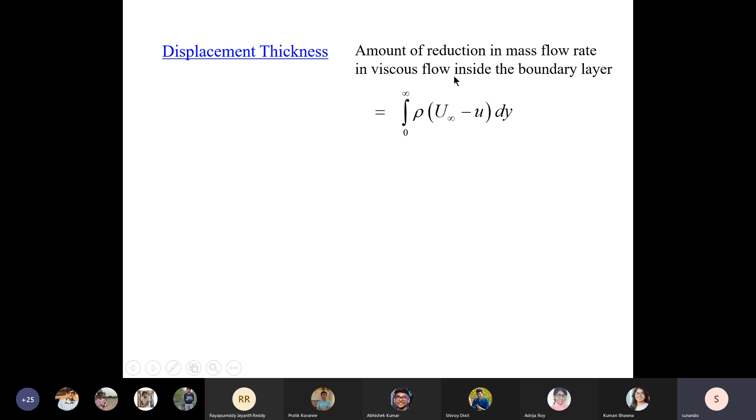The reduction would simply be the difference in velocity multiplied by rho, integrated over the entire thickness of the boundary layer. I am assuming the depth is taken to be unity, meaning in the z direction it's not affecting the velocity. So to evaluate the reduction in mass flow rate, I simply multiply delta u, the difference between what it should be in inviscid flow and what it is in viscous flow, by rho into area, which gives the reduction in mass flow rate due to the viscous nature of the flow inside the boundary layer. Any question?

Okay, so if you'd like to equate this situation with the inviscid flow, what we need to do is raise the platform, what you have seen in the previous figure, raise the solid platform, let's say by a distance, by a yet-to-be-evaluated, yet unknown distance delta star. So some amount of flow area in inviscid flow you are completely obstructing in order to obtain the same amount of reduction in mass flow rate.

So previously, whatever be that value, you are making sure that the delta star distance will be blocked for flow so as to make the reduction in mass flow rate equal to the reduction in mass flow rate which you would obtain because of the viscous flow. So if you have blocked out this delta star, what is the mass that you are not allowing to pass? It must be equal to u infinity, because in inviscid flow the velocity would be u infinity, and of course rho would be there.

So for per unit depth, the reduction in actual mass flow rate is equated to a hypothetical situation of inviscid flow with a reduction in area. When both of these are equal, the distance by which the platform is to be raised, which is delta star, is known as the displacement thickness.

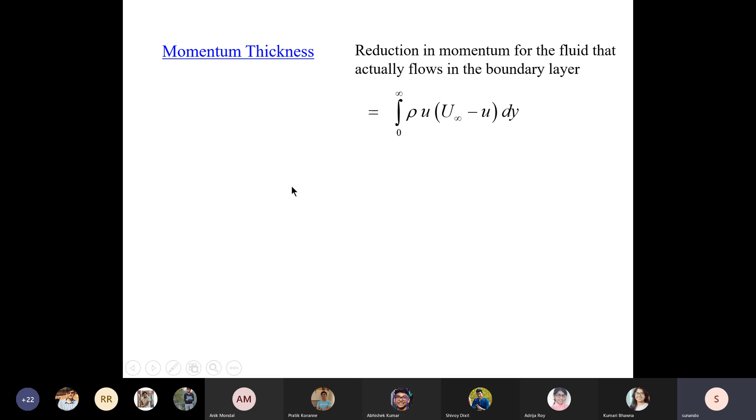So this is what the reduction in momentum flow rate is. Now, in order to obtain the same reduction in momentum, let's say I have to raise the platform, the plate, up by a distance equal to theta. So if I reduce the flow area by raising the platform by a distance theta, then the reduction in momentum must be equal to rho u infinity theta star.

That's the mass which is not passing, which is not allowed to flow now. And that mass, if it had been allowed to flow, would have a momentum equal to this mass multiplied by u infinity. So theta star is the reduction in momentum flow rate, which is equal to whatever we have discussed.

So if we equate these two, we get the expression for theta star, but there is another u missing here, u infinity missing here. Please change this, I will do that.

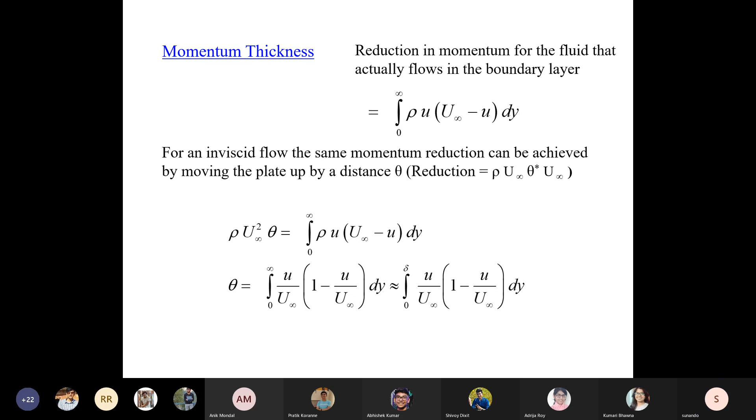We will keep these definitions in mind, and when we talk about the momentum integral equation in subsequent classes, you would see that theta and delta star would appear in the expressions, and it's very straightforward. It's almost like this name sounds something very serious, but momentum integral equation, once you learn how to use it, it's going to be simpler than the Navier-Stokes equation, which you have handled in your second year.

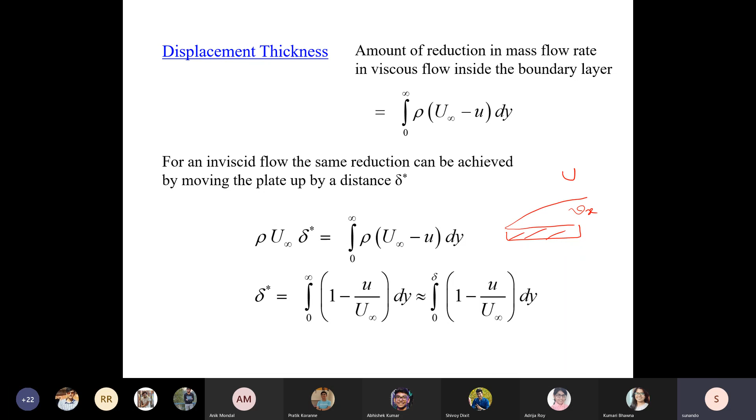What I'm going to do now is give you some handwritten notes. This isn't in your text, but I talked about the Blasius solution, which is an analytic solution. I will go through this quickly. The important part is not the solution process itself.

The important part is what you make with the solution. Is there additional information or insight that can be obtained if we solve it analytically, followed by numerical solution of the governing equation? So I'm going to show you some of the steps, not all, since not all are important.

The key concepts I will mention, just stay with me for the next 10 minutes, and we will convert the governing PDE to an ODE. We have two equations: the equation of continuity and the equation of motion. Notice the equation of motion does not contain del square Vx del x square, for reasons already discussed.

What Blasius saw by analyzing data is that the velocity in the x direction, when plotted against a non-dimensional distance from the solid wall, has a definite relation between the two. The non-dimensional velocity is u over u infinity, related to the non-dimensional distance y over delta, where delta is the local value of the boundary layer thickness, which is a function of x. This equation is to be solved with the boundary conditions already discussed.

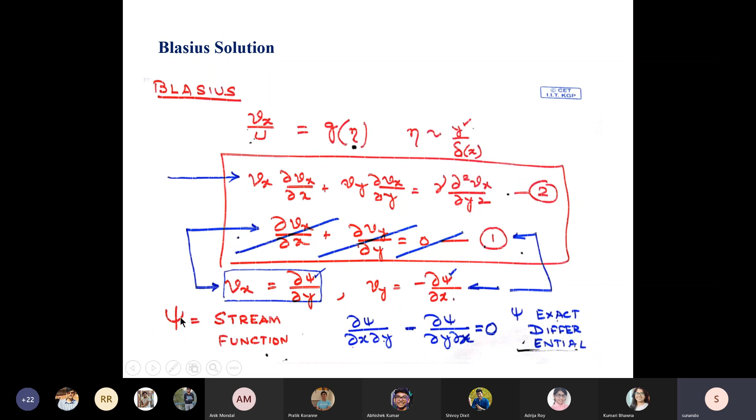That means we have one less equation to solve, and all the velocities are to be converted not as Vx or Vy, but in terms of the stream function, and then we can solve equation number 2 this way. So this is my equation.

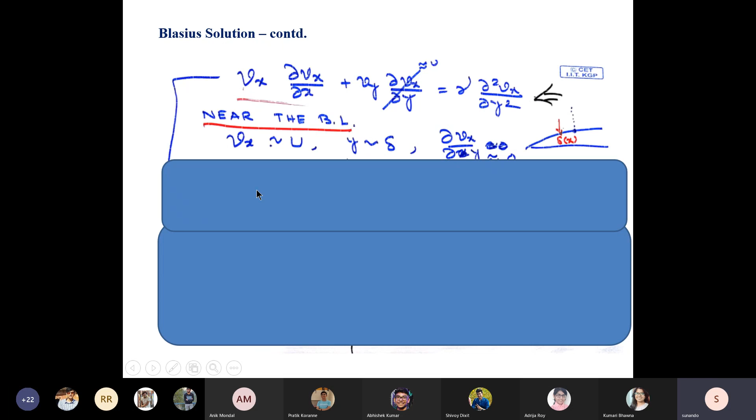We could see that near the boundary layer, the velocity is going to be approximately equal to u, as y tends to delta, and del Vx by del y, the gradient of velocity with respect to y, would also approach zero. Considering these approximations, we can do an order of magnitude, approximate analysis of the governing equation for the boundary layer.

Near the edge of the boundary layer, this term will vanish, and this will have a certain order, whereas the right hand side will have the order of nu, the kinematic viscosity, and del square Vx by del y square would simply equal u by delta square. The purpose of this analysis is to get a relation between x and delta.

How is it done? If these are equal, then delta square will be of the order of nu x by u, where u is the free stream velocity -- it's not an equal sign, but an order relation.

Going back to the previous step, we are defining a combination variable. One way to solve a PDE is to define a combination variable, and here it's eta, which explicitly contains y and implicitly contains x through delta. If we get an approximate relationship between delta and x, that should suffice to get an expression for eta.

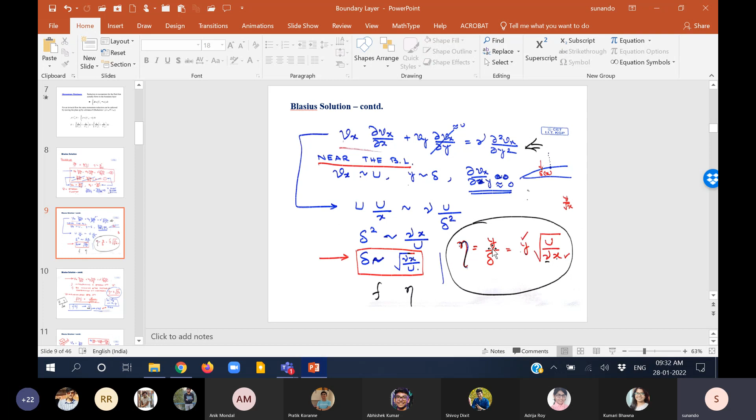So we introduced a stream function, then invoked the method of combination of variables to obtain this eta. Since this equation is dimensionless, I'm simply writing a dimensionless stream function. The hope is that once I substitute this in here, I would get an ODE between F of eta and eta.

That's how you convert a PDE to an ODE. I would just show you some of this. If you are interested, you can take a look at it. It's not in Fox and McDonald, but in earlier versions it was there, and it's available online, so you can take a look.

So I find out what Vx is, which from the definition I know is del psi del y, the stream function. Then I convert everything in terms of eta. What we get is Vx equals u df d eta. Similarly, I can find the expression for Vy. These two are the main results which we are going to use subsequently.

But let's proceed with this. It has been shown by Blasius, and you can take a look at the few more steps needed to ascertain that defining an eta combination variable reduces the PDE to an ODE, a nonlinear ODE like this one, where f is the dimensionless stream function and eta is the distance variable, which of course contains both y and x together. The important observation is that it's an ODE right now, so it would be easier to solve compared to the PDE we were dealing with before. So this is what the equation is all about.

I'll go back to this. Vx gives... so what is going to be the value at eta equals 0? Please participate a little bit more. I understand this is not the ideal situation, but I would at least like to hear some comments from you, questions, or whatever. Can you hear me? Am I audible?

Yes sir, okay, if I am audible, just try to answer that. How do I say that f prime is 0 at eta equals 0? Is it not obvious from here? At eta equals 0, that means on the solid plate, due to the no-slip condition, Vx will have to be equal to 0. So f prime will be 0 at eta equals 0.

Would that give me something? I have used the definition of Vx as obtained from the non-dimensional analysis I performed, and I have obtained that at eta equals 0, f prime will have to be equal to 0. But does this give me any other boundary condition for what f is at eta equals 0? What is going to be the value of f? Looking at these two, can you tell me what the value of f is at eta equals 0? I understand that at eta equals 0, f prime is 0, but what is the value of f itself? Just concentrate on the two red boxes.

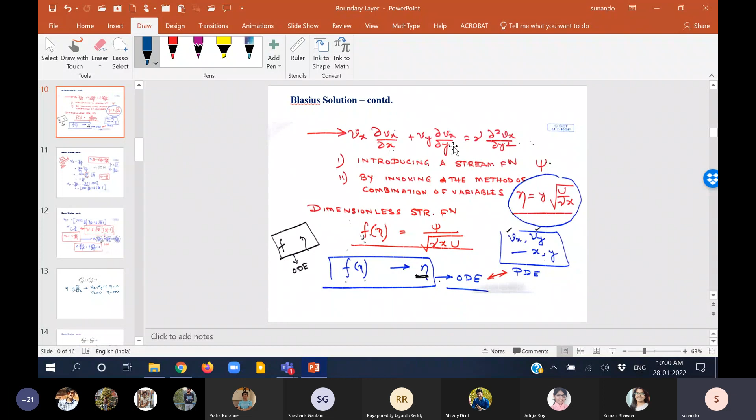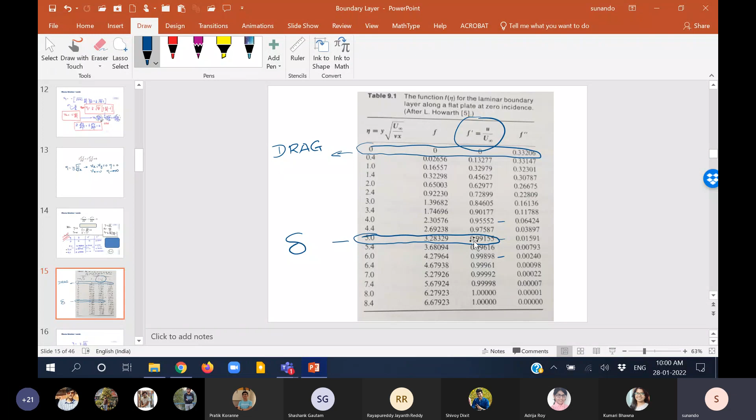Even for the simplest case, you have to do a lot of mathematical jugglery, identify some dimensionless combination variable eta, with which each of these terms transforms the PDE to an ODE. This underscores the utility of the analysis we have discussed so far, but also highlights the severe limitation, the severe restriction we have on such results for delta and, for example, CD or CF. So what is going to be the case if it's not flow over a flat plate, but over a curved surface?

How can I treat turbulent flow, which is the most common industrially relevant flow situation in most cases? The analytical approach gave us very good understanding for a simple situation. It tells me that delta varies with root over x, and gives an idea of how CF varies with x and other parameters. But it is a restricted form of the solution, and we must realize this approach is untenable for complicated geometries and complex or turbulent flow.

It is very likely that the growth of the boundary layer that you see here, when turbulence sets in, is going to change. The rate of growth suddenly shoots up when we convert from laminar to turbulent, and it becomes quite disturbed. The edge of the boundary layer changes its position with time, becoming an irregularly varying or oscillating boundary layer, and it is definitely not possible to use the approach we used before.

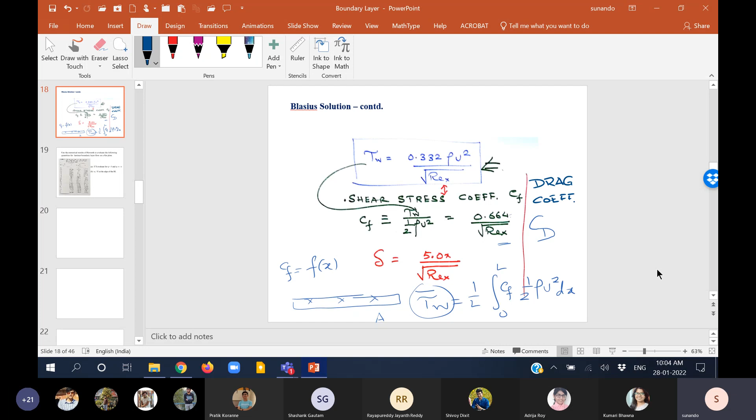Any question? Okay, I will take a break, and once I come back, we will solve some problems based on whatever we have discussed so far.

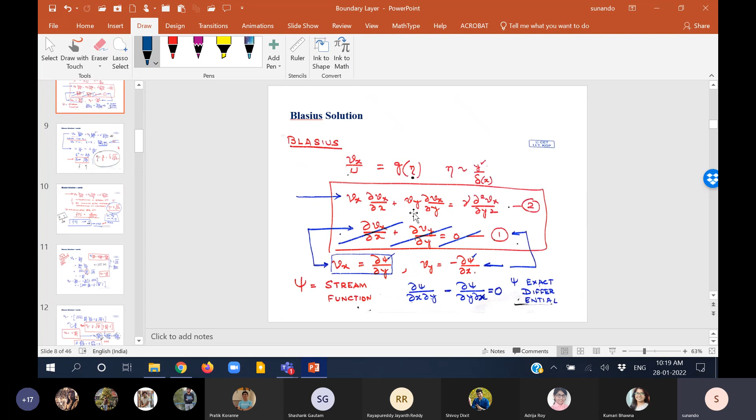The first part, A. And the definition of delta star, I'll reproduce for you. That's the definition of delta star. And of course, you have to use the definition of eta, where eta is simply y times root over u by nu x, where nu is the kinematic viscosity and x is the actual distance.

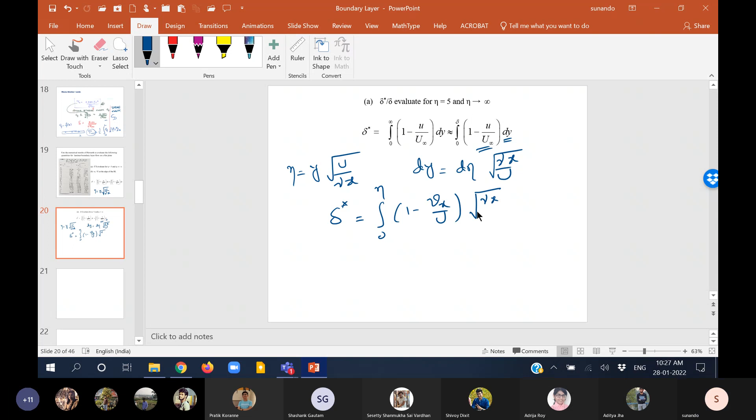And delta star in the formula that we have is going to be integral from 0 to eta of 1 minus Vx by u, and d eta can now be this is what we should get. And then ultimately what we get for delta star is, if I take this out...

What should be there inside the first bracket? What should I write inside the first bracket in place of 1 minus Vx by u? 1 minus f prime, 1 minus df by deta. So now you can see that we are in a position where I have started with the definition of delta star and converted it into d-eta, etc.

The thing that is still remaining is this. So if you look at the question here, you're going to find out delta star by delta in terms of some value of eta. So I am pretty much confident that I will be able to handle the integrand, but I am missing delta over here. So do you feel that this is something which we can convert to delta?

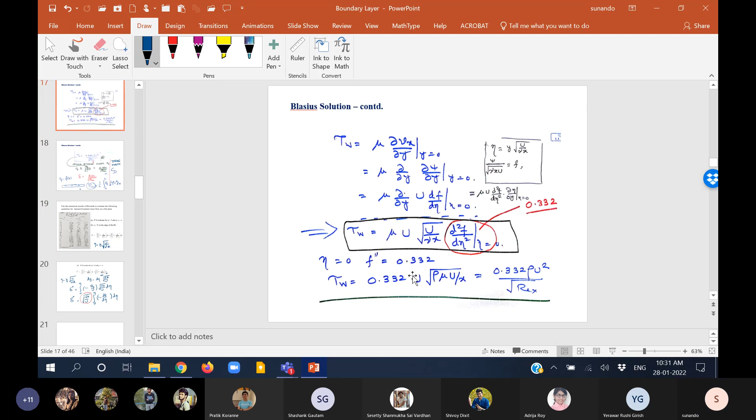Yes sir, okay? To continue with what you have said, let me go back a bit. You are talking about this one, right? Yes sir. Okay, so if that's the case, then your delta by five is x by root over Rex. Or rather, you are talking about this part. Maybe the square, the rectangular bracket, is something more meaningful here, where we can see that five equals delta root over u by nu x.

So keep this in mind, and let's go back to the problem that we are talking about. So what are you going to say about nu x by u? I'll go back to that once again. What is nu x by u in this case? Isn't it delta by five?

This which we have obtained in our derivation just a few, maybe 10-15 minutes back. If I concentrate on this, I would be able to convert this delta star as delta by five, and then whatever we have on the right hand side. Do you agree or not?

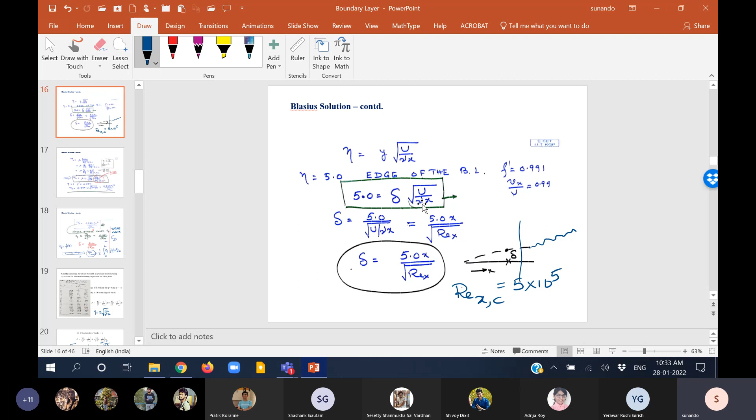Root over nu x by u is simply delta by 5. I will go back to this once again. If you look at the expression over here, if you simplify this, if you substitute the value of expression for Rex, you essentially get the same one. So from here, delta by 5 is simply the inverse of this, and that's what we have in this expression, root over nu x by u. So this must be equal to delta by 5.

So if I go back and write it, what I get is delta star is equal to delta by 5, and the integrand then becomes integral from 0 to some value of eta of 1 minus f prime times d eta. And if I integrate this, I get equal to 1 by 5 times eta minus f from 0 to eta.

And here I have to use the value of eta equals 5 in one case and eta equals infinity, and find out what is the ratio delta star by delta.

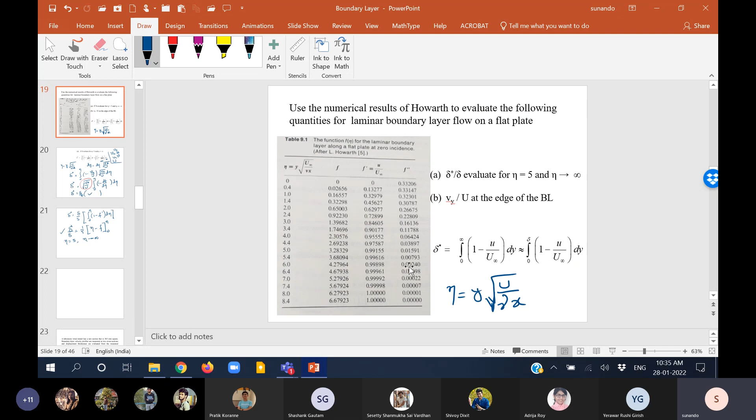The problem that you are going to have, so let's go back to this table and try to see what this is going to be. So I'll go back to this table, and what you have seen is that delta star by delta equals 1/5 of something. 1/5 of what was the result? 1/5 of eta minus f.

So, 1/5 of eta minus f. So you know the value of eta is 5, and the corresponding value of f is 3.28 something. So you are evaluating delta star by delta to be equal to 1/5 of eta minus f from 0 to eta. So as far as this part is concerned, you do not have a problem, because the value of eta at 5 and the value of f at eta equals 5, these are known to you. You substitute 5 minus 3.28 and you get the value of delta star by delta for this value of eta.

But how are you going to find out eta equals infinity? It's only up to 8.4 that's provided. Purposefully, nothing is given beyond 8.4 in the Howarth numerical solution. Think and answer.

So because anything beyond eta equals 5 can be considered infinity, because the free stream velocity won't change. I agree with you, but do you mean to say that if I say 5 here, the corresponding value of f is going to be 3.28? But let's see if I take 7, and this becomes 5.27. So I accept your observation that anything beyond eta equals 5, it's not changing much.

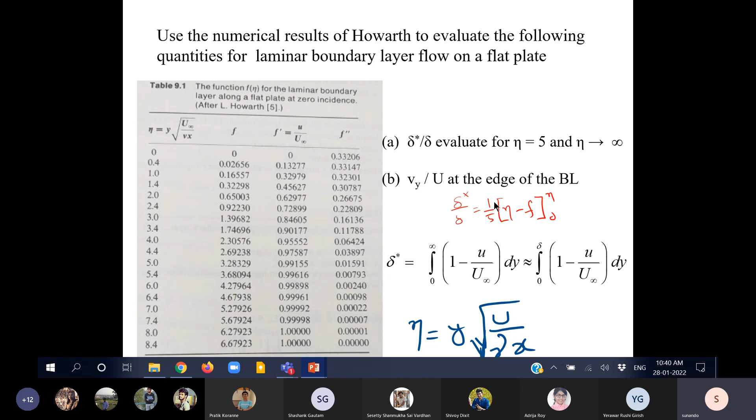Okay, now you concentrate on the second part. But before that, I would like to ask you something about the boundary layer. Let's go back to the first figure. The boundary condition for y equals 0 is that Vx and Vy are both equal to 0 at y equals 0, that's the no slip condition. When we reach the edge of the boundary layer, Vx is equal to u infinity, but we were silent about Vy. What is your impression about the value of Vy at the edge of the boundary layer, where Vx equals u infinity?

What do you think may have happened? Is it equal to 0? Or can it be equal to 0? This has important implications in some industrial applications as well. But I would like to know your opinion about the possibilities of Vy. Is it equal to 0?

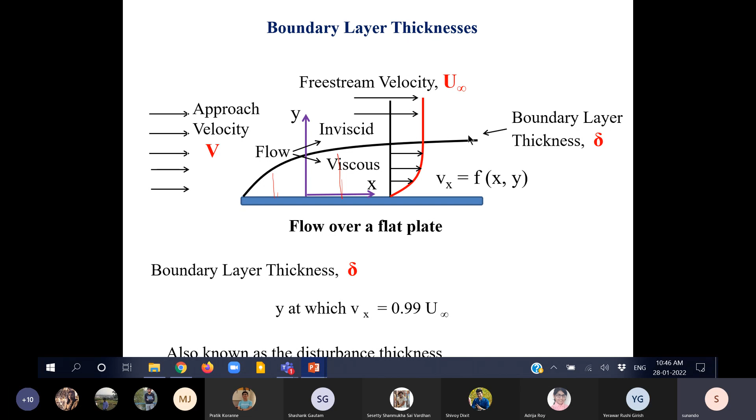Do you think you would be able to call the edge of the boundary layer a streamline now? No, sir, if we have a non-zero Vy, the layer would not grow otherwise. So the two ways by which this question can be posed: find out what is Vy, which you are going to do, and the second thing is we understand that the edge of the boundary layer is not a streamline. That's the second important thing we can infer.

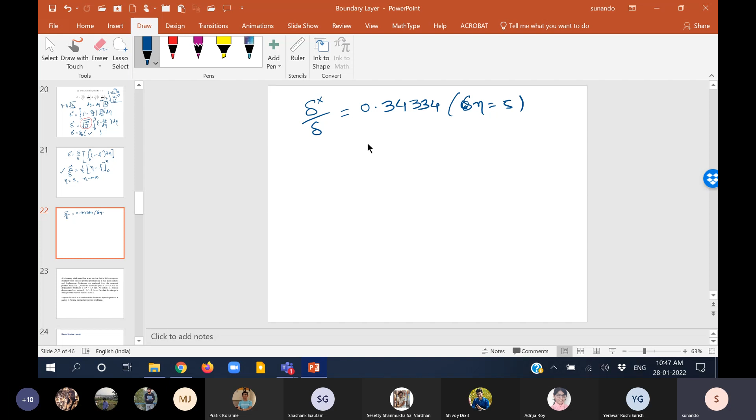So the values, the answer for the first part, delta star by delta, would be equal to 0.34334 for eta equals 5, and equal to 0.34415 as eta tends to infinity.

And then we'll go for the evaluation of Vy by u. So if we try to find out what is Vy by u at the edge of the boundary layer.

And we write the expression for Vy, which I have shown before. Of course, you do not have to remember any of these, since I will always provide you with the expressions.

So from here, you can write Vy by u, and you would get this to be equal to 1 by 2 times root over Reynolds number based on x, eta f prime minus f. You should check this on your own.

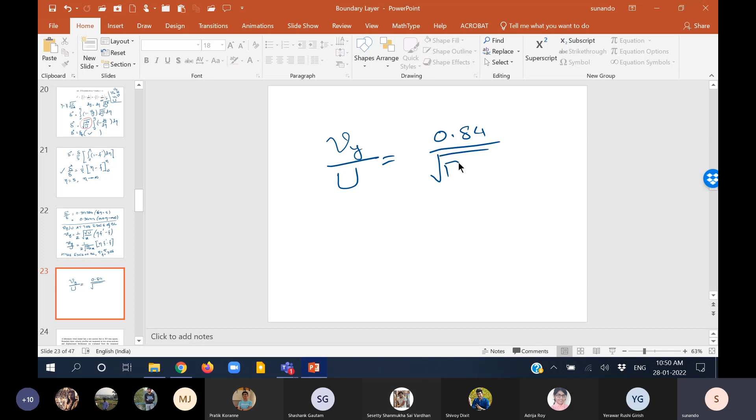This is the expression for Vy by u that you would get, and at the edge of the boundary layer, you can write eta equals 5, and the corresponding value of f you could get from the table to be equal to 3.28. Therefore the final expression for the velocity at the edge of the boundary layer, you would see, is 0.84 by root over Rex. So this is the expression for the non-zero velocity at the edge of the boundary layer.

This also shows what we would expect: as the Reynolds number increases, as we go further into the axial position, the value of Vy decreases, and therefore the rate of growth of the boundary layer decreases with increase in x. So initially it will grow faster since the Reynolds number is small, but as Reynolds number increases, the value of Vy decreases, and the growth of the boundary layer is somehow arrested. The important point remains that the edge of the boundary layer is not a streamline.

In the remaining 6-7 minutes, I will discuss the last problem, and I will only give you the pointers. You are going to solve it on your own.

So you have a laboratory wind tunnel that has a section which is so and so.

I have a doubt in the previous example. Please tell me. You're saying that the flow rate increases as x increases. Can you explain that part?

I would say that the amount of mass which is... this is the boundary layer. So if you take a cross section and find out the amount of mass crossing this, and the amount of mass crossing this has to be more than this. Otherwise, the boundary layer would not grow. If this is more than this, which obviously it is, then there has to be some sort of inflow through the edge of the boundary layer. Otherwise, how can it grow?

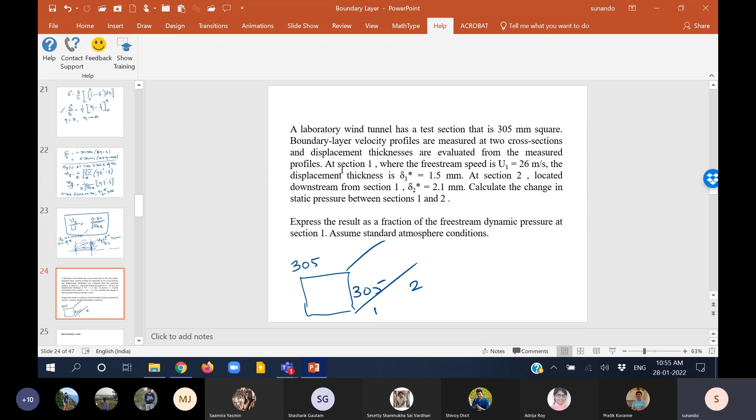Boundary layer profiles are measured at 2 cross sections and displacement thicknesses are evaluated. At section 1, the free stream speed is U1 equal to 26 meter per second, and displacement thickness delta 1 star is 1.5 millimeter. At section 2, delta 2 star is 2.1 millimeter. You need to find out the change in static pressure between 1 and 2.

There is one concept, just one concept you have to identify, and then the problem is extremely simple. Can you identify the concept involved in this specific problem? What can you say between 1 and 2? What type of flow is this when you consider displacement thickness?

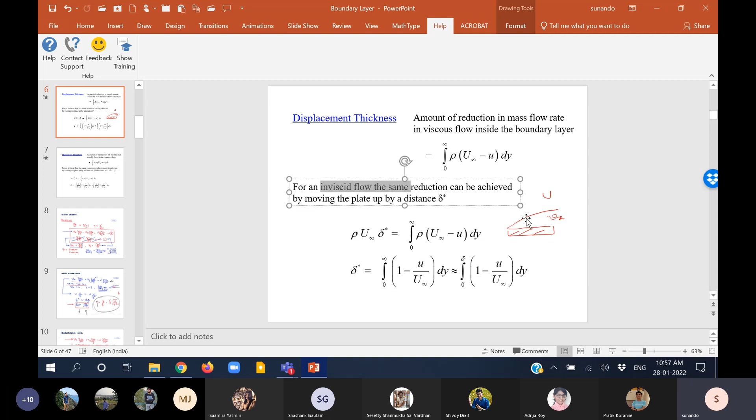I once again go back to the concept of displacement thickness. The displacement thickness is a concept where the entire flow is treated as inviscid when you move the plate up by a distance delta star. So if I move this plate up by delta star, then essentially the rest of the flow becomes inviscid. That was the concept of displacement thickness.

Now let's come back to our problem. How do I convert this problem to a problem of inviscid flow? If I reduce the cross section available by a certain distance, then through that reduced area, the flow can be treated as inviscid. Am I clear and correct?

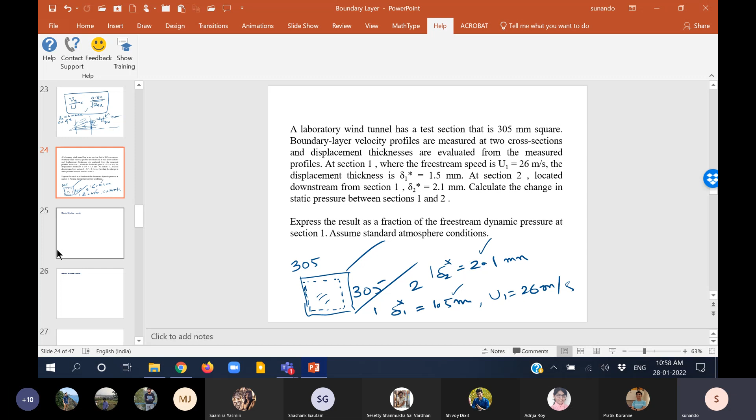If I could reduce from all sides by some distance, then the result is that the flow through that reduced area is inviscid. Then what is the distance by which I have to reduce it for my calculation? 2.1 mm at location 2 and 1.5 mm at location 1. So the entire problem then becomes an inviscid flow.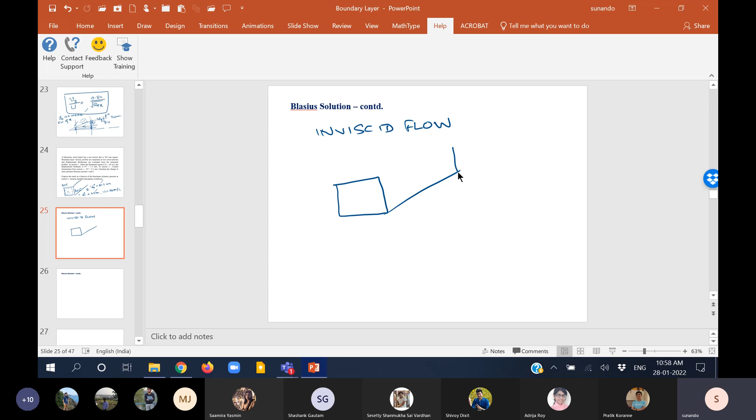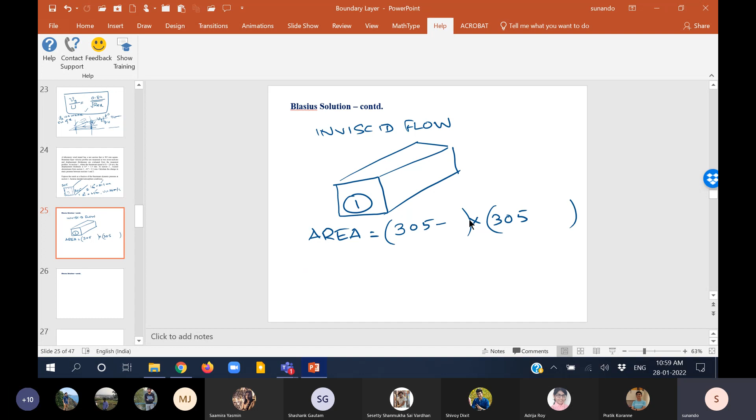So I have flow through this, and over here, station 1 will have an area. What will be the area at station 1 for inviscid flow? Instead of 305 into 305, what would be this area? I have reduced it, so what would be this area at 1?

It is inviscid flow now, so it must be equal to 2 into 1.5 millimeter. And over here, it's going to be 2 into 1.5 millimeter, in order to account for growth of boundary layer from all 4 sides. Am I clear?

The whole idea of displacement thickness is to transform the flow from a viscous flow to an inviscid flow. So if I constrict the area by this much from both sides, then what I have is a new area through which the flow can be treated as inviscid. At location 2, it is simply going to be 305 minus 2 into 2.1, and 305 minus 2 into 2.1, this much millimeter square. So at 1 and 2, the flow is inviscid now.

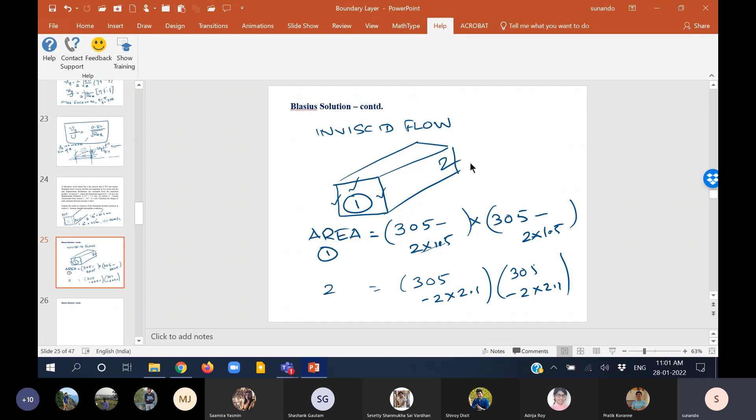The problem states that I have to calculate the change in pressure. So if the flow is inviscid, what can I use in order to find the pressure difference between the two? Which equation should I use? Bernoulli's equation. So it becomes a straightforward problem of Bernoulli's equation, and I will assume there is no effect of gravity.

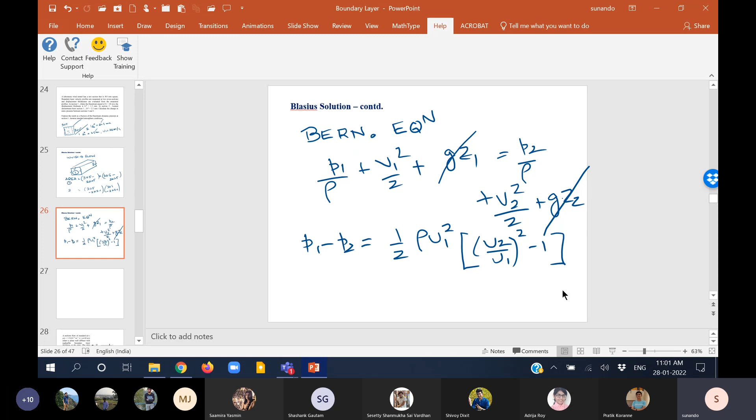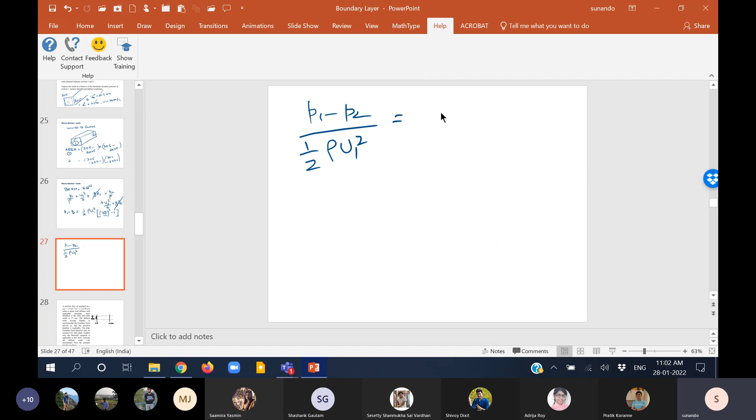P1 by rho plus V1 square by 2 plus GZ1, which is 0, equals P2 by rho plus V2 square by 2 plus GZ2, also equal to 0. So you can write P1 minus P2 is half of rho U1 square times U2 by U1 whole square minus 1. The final expression would be P1 minus P2 by half rho U1 square is equal to U2 by U1 square minus 1.

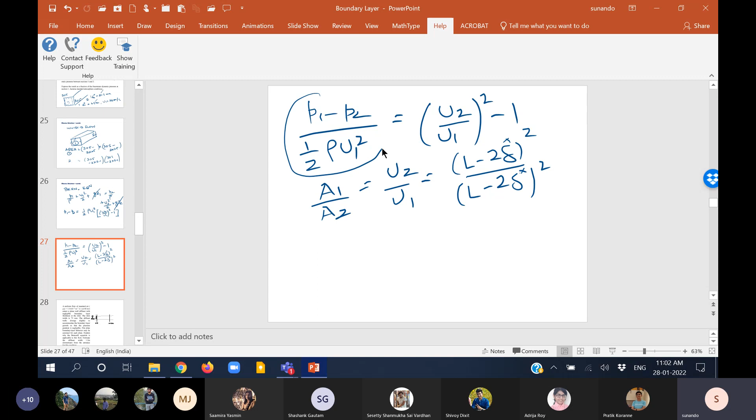And we know from equation of continuity A1 by A2 equal to U2 by U1. This is L minus 2 delta 1 star and L minus 2 delta 2 star, whole square. Then you could find out what is the numerical value of this, and this is going to be about 0.016, so less than a 2% change.

The only other factor which you have to keep in mind is the result as a fraction of free stream dynamic pressure. The free stream dynamic pressure is where the kinetic energy has been completely converted to pressure, which is known as the stagnation pressure, or you can convert it into stagnation pressure that you can measure using a pitot tube. This is also known as the dynamic pressure.